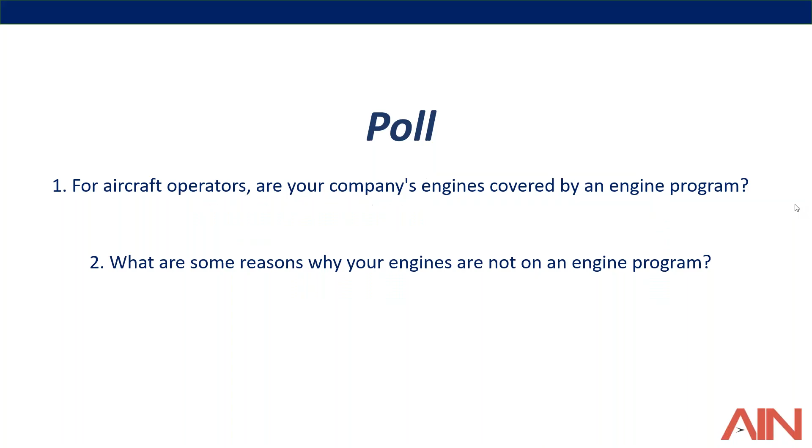Thank you, Matt. Thank you, everyone at AIN, for hosting this event. And also, I'd like to thank Tony and Lee for joining us. As you said, my name is Andy Robinson. I'm responsible for delivering customer support and services for our business aviation fleet. I've been with Rolls-Royce for just over 40 years, predominantly in customer-facing roles, whether that be in support or service for both airlines, and for the last 11 years for the business aviation fleet. Go to the next slide, please.

This slide is just to give you a little background on Rolls-Royce. We've actually been in business aviation for over 60 years, starting with the Dart engine that powered the Gulfstream 1, and right the way through to our current portfolio of engines that are predominantly powering today the Citation 10, the Embraer Legacy, the Gulfstream 3, 4, 450, 5, 550, 650, and the Bombardier Global Expresses.

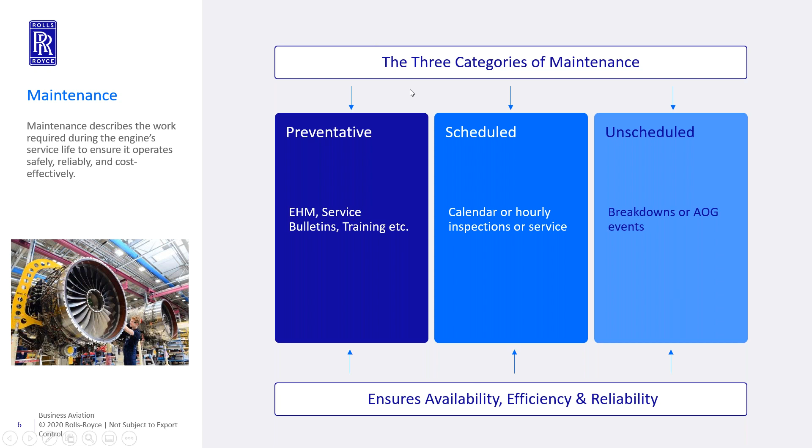Next slide, please. So how does a maintenance program work? Well, typically you pay a fixed dollar per flying hour, and that fixed dollar per flying hour is for a contract term.

Under at least the Rolls-Royce program, particularly the new Corporate Care Enhanced program, any unexpected event, any planned event, whether that be an AOG, a nacelle or power plant related event, or an unscheduled shop visit, anything that occurs on the engine during that period is covered by Rolls-Royce as part of that fixed dollar per engine flying hour. That fixed dollar per engine flying hour is effectively your fixed cost, and any risk of cost exposure above that is transferred to Rolls-Royce. So if, for example, you've paid in $100,000 and you have a $1 million event, the exposure is all Rolls-Royce. You don't have to pay anything more than what you've already paid in.

And if there is an event, there is no increase in rates. Your rates remain per the fixed dollar per flying hour coverage that we negotiated and contracted at the start of the agreement.

How is engine maintenance evolving? I think a big change and evolution for us is around the engine vibration monitoring system. The Pearl 15 and the Pearl family of engines has got the latest engine vibration and health monitoring unit, capable of monitoring over 10,000 parameters, which means we can now, for the first time, monitor accessories on the engine. We can see an accessory, and most events or aircraft operational disruptions are typically caused by an accessory on the engine that prevents you from flying.

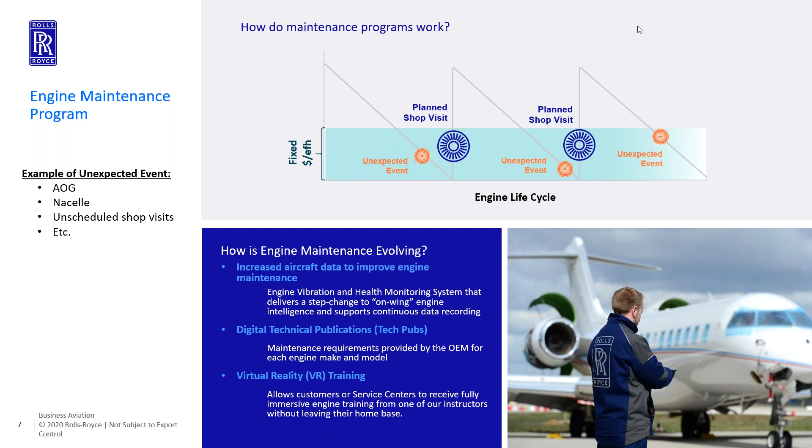Here are some of the direct advantages of an engine maintenance program. Residual value benefits: we see aircraft sell quicker, approximately 100 days faster than an aircraft that's not on the program, and they typically sell for more.

When it comes to transfers, our program is fully transferable with no transfer fees. As I said before, it brings predictable, budgetable maintenance cost, eliminating any large spikes in maintenance bills, and cost risk is transferred to Rolls-Royce.

We also have a global infrastructure and are able to give priority access. Through the maintenance program, we already have a contracted obligation to deliver, so we don't have to chase down quotes. We have priority access to our global network of spare parts, lease engines, and most importantly our 24/7 availability center in Berlin, and our full suite of business aviation teams around the world. I'll give more details in a couple of slides.

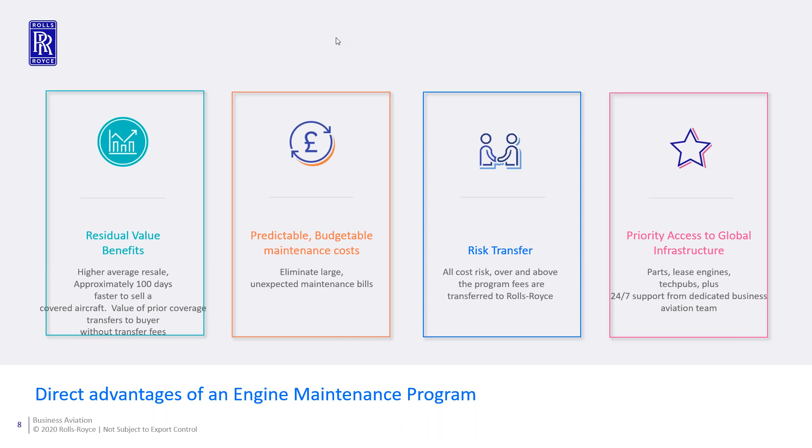One of the key differentiators and responsibilities of an OEM, particularly with an engine maintenance program, is to deliver capability to a global customer base. We have over 2,500 aircraft under an engine maintenance program with Rolls-Royce located all around the world. While the majority, about 60% of the fleet, is in North America, the North American fleet in normal times flies all over the world too, so it's very important we have capability wherever you fly.

Rolls-Royce has a dedicated team for business aviation. Some manufacturers may mix it with their airline teams, but we chose not to, because we recognize business aviation customers have a very different requirement and focus. So we have a dedicated team of customer managers around the world.

We have AOG support and remote site rescue capability around the world through our on-wing services. We have approximately 65 technicians in 16 different locations who are specialists in the more complex engine tasks. We have the authorized service center network, where we've partnered with our OEMs and other third-party service centers to deliver corporate care services.

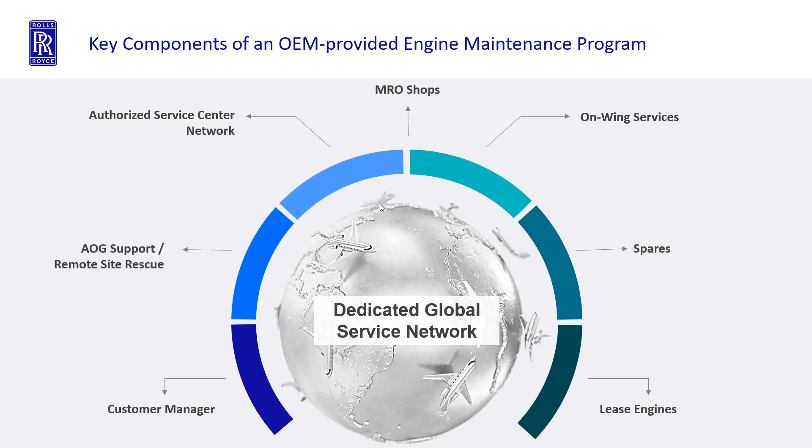Next page, please. We thought we'd give an example of an AOG, and I noticed that many of you have had no events, which is great, but there are events, and with our fleet that we manage, around 3,800 aircraft, we manage roughly 3,000 types of events, not necessarily AOGs, a year. So we have a lot of experience in dealing with the logistics and challenges of supporting customers around the world.

So just as an example of the costs that you can expect that would be covered under a maintenance, or at least our maintenance program, we would cover obviously the 24/7 operational service desk, the mobile repair team, travel costs, deployment logistics, the tooling that's required, the troubleshooting that's required, any parts that need to be required, any return of the repaired parts and the repair of those parts are covered, the components themselves, and in some cases this could be some very large parts such as a thrust reverser that's got corrosion, covered. We cover charter flights, whether that's a charter flight to take the part to you or a charter for an aircraft to come and help you complete your mission.

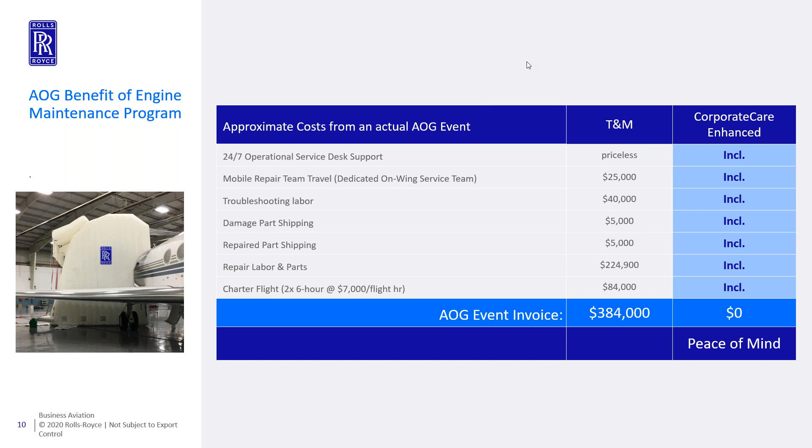And so this is my final slide. As I hopefully demonstrated, the maintenance programs typically provide a comprehensive and innovative care. We do spend a lot of time talking to our customers, and we have a corporate customer council, or C3, that typically sits twice a year. It's been running for 9 to 10 years, and we have two councils, one international and one North America, and we have around 20 to 25 customers that sit on each, helped us develop the location and the needs of our network, focus on availability.

So the 75 service centers I talked about, the on-site part stores, the 65 on-wing service technicians, the lease engines, and the alternate lift requirements that are needed have been helped to be developed and polished, if you like, in terms of its efficiency through our customer input. Equally, they helped us with the 24/7 support, which has now enabled us to deliver a 99% averted missed trip performance on a regular basis. And on average, we see around a 24-hour AOG return to service, which again were metrics that were established by talking to our customers and goals that were set by our customers.

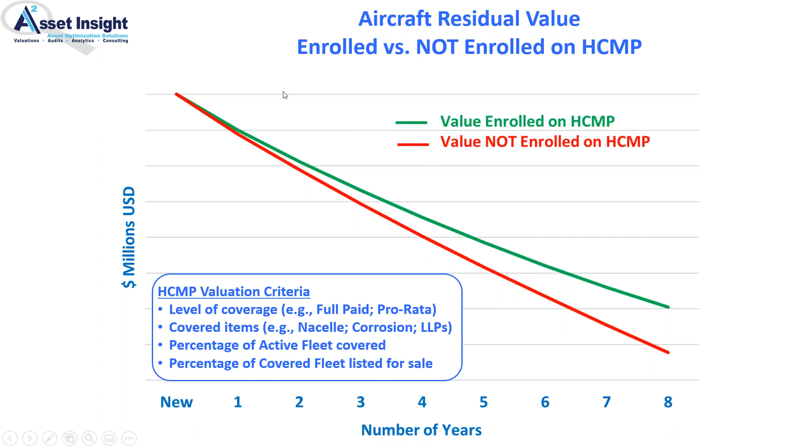So let's explore that. Next slide, please. Whoops, I think we went too far. There we go.

There are some misconceptions about engine maintenance programs that are worth reviewing. One is that engine programs provide no value while the aircraft is under warranty. That's simply not true.

These programs in fact provide real value during the warranty period through coverage of things like line maintenance, parts and labor, training, technical publications, which Andy went into a little while ago, engine health monitoring - again, you saw some of the capabilities that Rolls-Royce has - and coverage of unscheduled event expenses usually not covered by the engine warranty.

These risk mitigation benefits may or may not be covered under warranty, so if you have a warranty event, while the engine warranty is likely to pay to repair the engine, all of these other benefits under a program are actually costs you would have to incur.

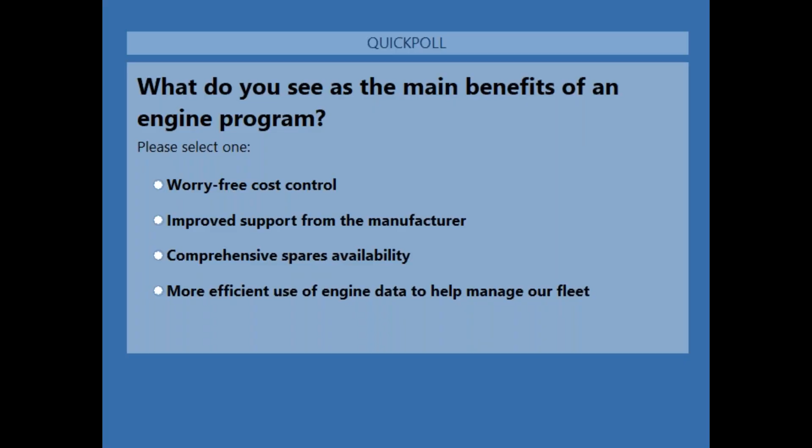Okay, that should be good enough. Let's see the results. The biggest one is worry-free cost control, followed by improved support from the manufacturers, spares availability, and then more efficient use of engine data to help manage the fleet. I suspect those are all important considerations, but cost control looks like the most popular.

From the technical point of view, as an A&P technician, there's nothing not to love about the engine maintenance program: the parts, the labor, the service bulletins, midlife inspections, engineering costs related to technical variances, publications, training for the technicians. All that's covered in an engine maintenance program.

And if you have one of the premium programs like Corporate Care Enhanced, you have nacelle coverage and alternative lift. This is where it really comes into play.

Our aircraft travel all around the globe, and it is impossible for me to know all the import and export laws of the various countries we travel to, nor do I have knowledge about work visa requirements, despite having a highly trained and qualified technical staff. The time component just to get them to where that aircraft may be down for maintenance is a consideration, but it could be even longer to get that work visa.

Nor do I have the intimate relationship with service centers around the globe, whereas companies like Rolls-Royce have invested the time and money to audit the various service centers and develop an extensive network of authorized service centers. They've gone in and vetted their safety management program as well as the training for their technicians.

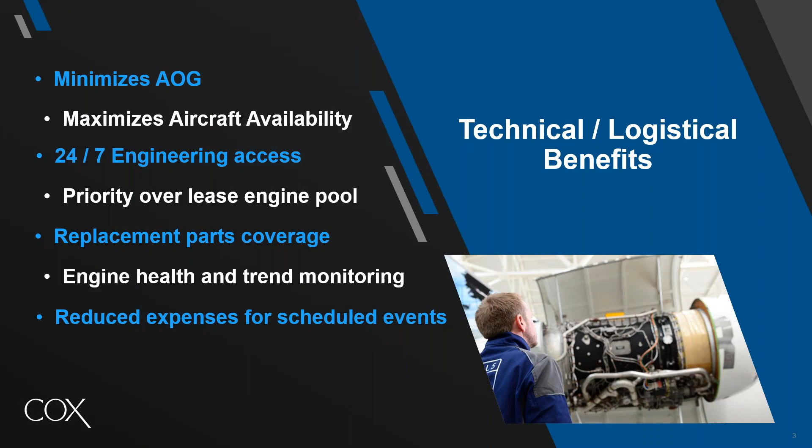Andy, we have a question: if there's no increase in the fee from a covered event, is that for the complete term of the contract or for a year? And actually, this also relates to how long is a contract? Is it multiple years? Do things change every year?

Good question, Matt. Thank you. Contracts are 10 years, and we agree a fee at the start of the contract, and the only increase on that fee is through the contractually constrained escalation formula that we agree. So there's no other changes, and that escalation formula, if it comes back to say the price increase year on year is zero, then the price increase year on year is zero. It's very much dependent on the indices in the calculation of the formula, but no, there's no increase in the fee post an event. That risk goes to us.

Andy, we've got another question about charter coverage for AOG events, and the questioner wants to know if that's new with Corporate Care Enhanced, because they had an issue when they were under Corporate Care, and apparently charter support wasn't available unless it was for an actual engine issue.